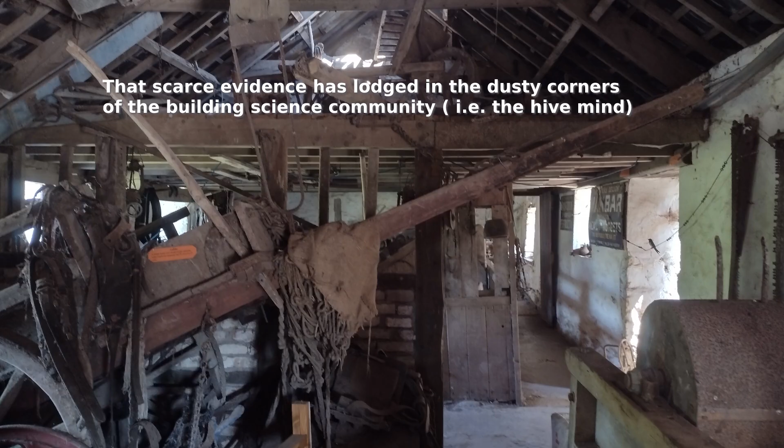Measuring airflows in buildings is a hassle, and it can take considerable resources. Evidence is scarce, and what little exists has gradually worked its way into the hive mind of the building science community, lodged in lots of different dusty corners. Details and assumptions get lost in translation on the way into that hive mind, so concepts get used in ways that the originators might find surprising.

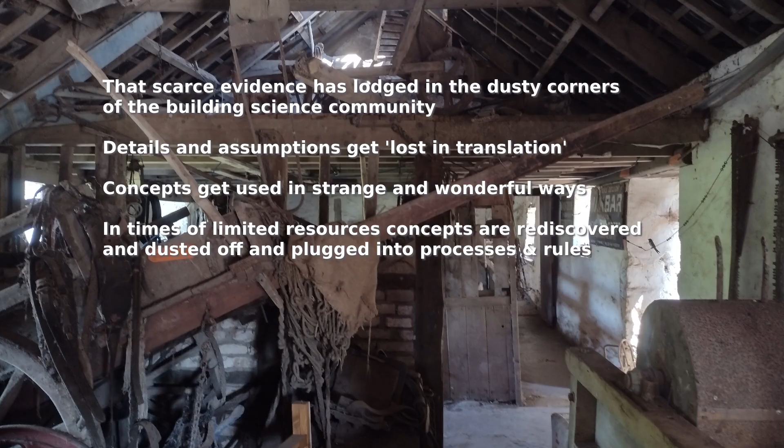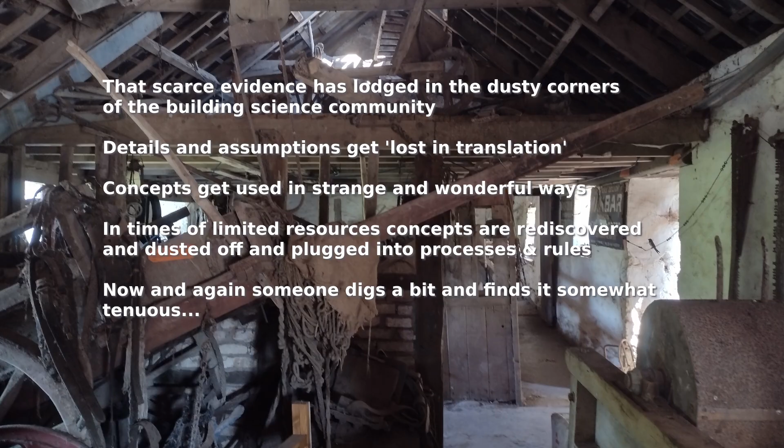Sometimes, when there are limited resources to tackle an issue at a fundamental level, the hive mind remembers one of its dusty corners, a bit of dust is brushed off, and it gets plugged into the various backroom processes and decision-making rules. Periodically, someone digs a bit, finds some aspect that's a bit tenuous or worse, and suggests an alternative convention.

So, suspect 1, the divide the 50 Pascal flow by 20 rule. Suspect 1 is a convention that assumes long-term infiltration rates can be estimated as a fraction of a blower door test value. There's lots of scope for this rather convenient placeholder in compliance regimes, especially in these times of limited resources. I found a couple of examples of groups investigating Suspect 1.

A paper in Energy and Buildings from 2020 compares the divide-by convention with tracer gas measurements in a score of residences in the East Midlands of the UK. The paper found a considerable gap between how compliance tools treated facade leakage and what the measurements were suggesting.

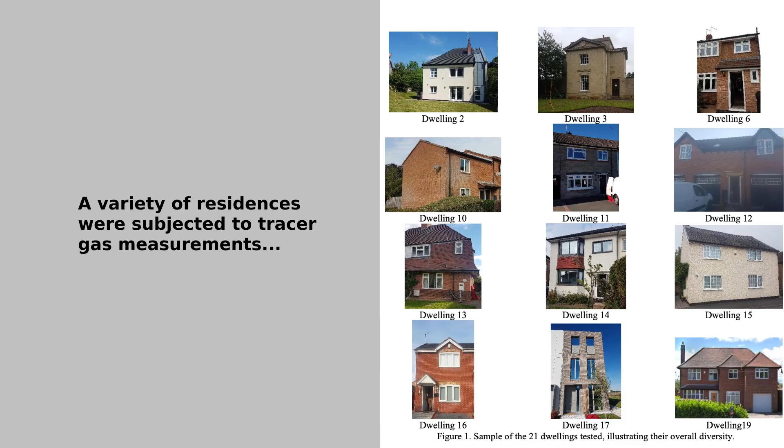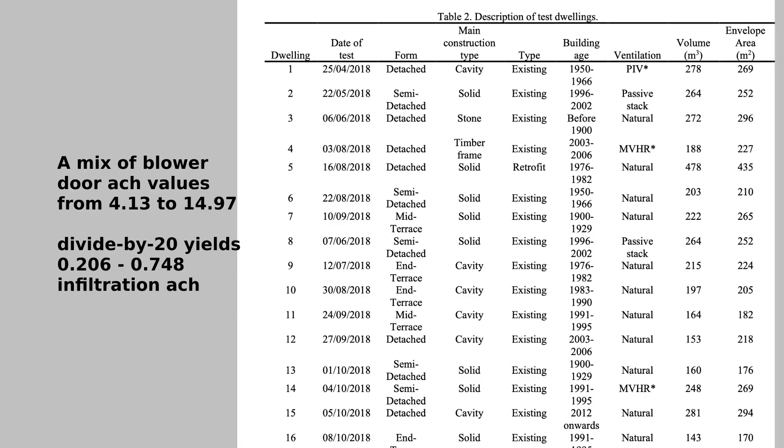The residences were a mix of construction types and ages, from about 1900 to 2012. The blower door test air change rates went from 4.13 at best to 14.97. If we take the divide by 20 convention, it would yield infiltration rates between 0.206 and 0.74.

My observation on this paper is that the building science community still does not measure enough, for long enough, and on an ongoing basis to inform decision makers. There have been incremental improvements in construction since 2012, and it would be really great if a new round of observations could be taken so there was some new information to feed into the hive mind. I'm not holding my breath.

Another bit of digging turns up a 2025 report looking at updating the methodologies for estimating infiltration rates in the UK SAP method.

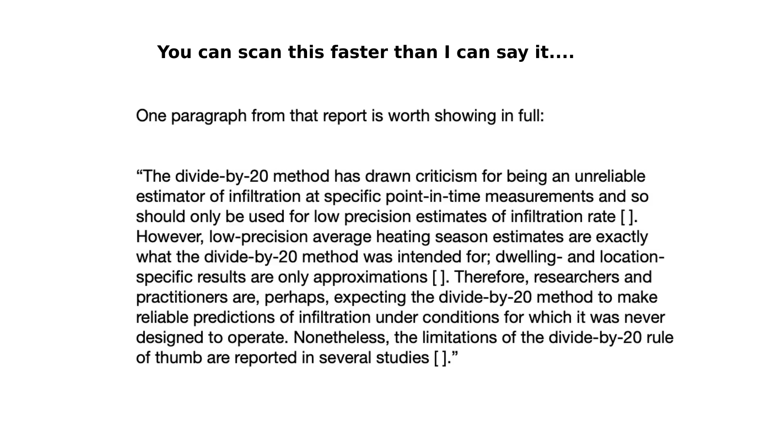My take on this report is that the hive mind forgot the convention was low precision. The thing is, the alternatives that were considered were, in general, still restricted to single zone treatments of a building, and they really only lightly touched on the possibilities of numerical assessments to help out.

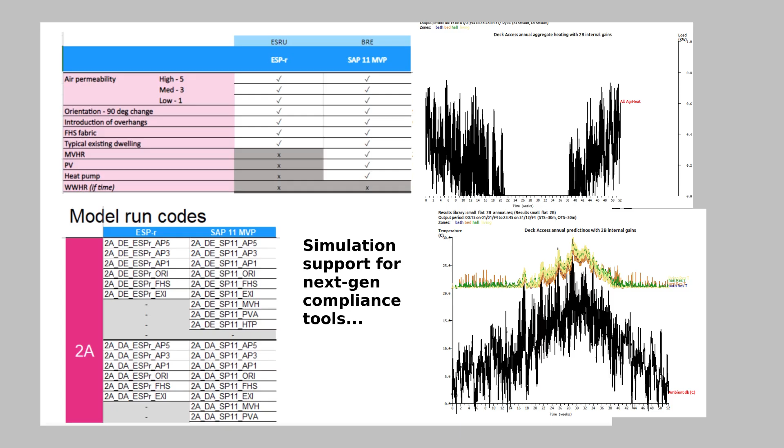On a side note, my group did scores of numerical simulations supporting the development of the UK Home Energy Model, and we found multi-zone approaches far superior to single-zone approaches. I hold a belief that we should let numerical tools do the heavy lifting.

So, let's see what that gets us in comparison with fixing infiltration based on some variant of the divide by convention. A reasonable first question: is that convention applicable when we've got tighter than best practice building blower door tests?

My prior video introduced calibrated orifices around a facade based on a 1.2 air changes at 50 pascals flow test, in the context of a 4-room test building. This flow rate is better than the tests mentioned earlier, but it's also not nearly up to the scratch of what's required in Passive House.

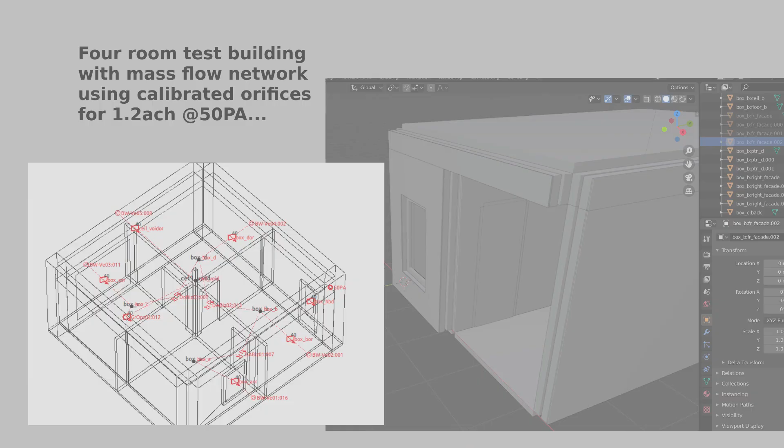Dividing 1.2 air changes by 20 gives 0.06 air changes. That seems to me to be a seriously small number. If we use 2.5 liters per second per person to limit CO2 risk, goodness, we're falling short. And yet, newspapers aren't full of death notices.

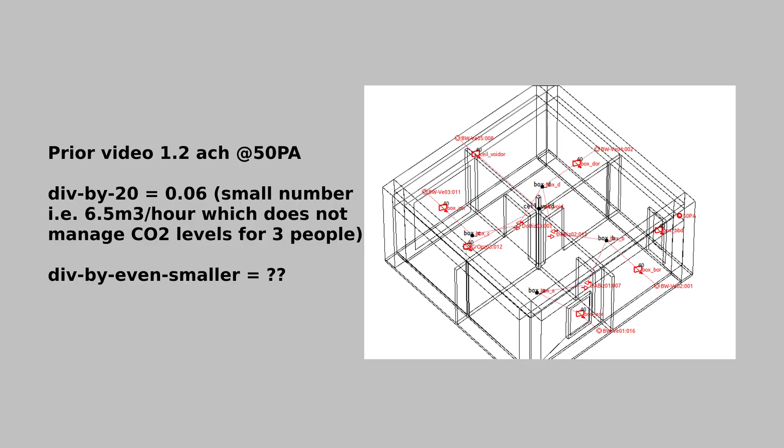A second reality check: remember the slide from the prior video suggesting that at a permeability of 1, which is kind of like Passive House, it's equivalent to a 5p coin-sized hole drilled in each 5 square meter section of the building envelope. Well, for our 4-room building, that's 50 5p-sized holes.

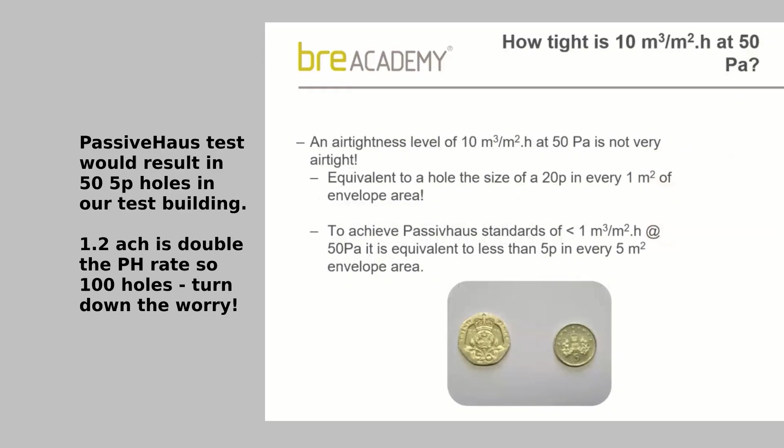In the prior video about the impact of changing wind exposure, there were clearly multiple sets of performance. Let's go over the annual headline numbers from the wind exposure study. Site changes minimally influence the annual extremes in dry bulb resultant temperatures, and they also minimally influence the peak cooling capacity or the hours that cooling is needed.

The annual gains and losses via facade leakage were equivalent to, say, 200 kilowatt hours for a city center site, up to 500 kilowatt hours for an open countryside site. The annual demands for heating range from 190 kilowatt hours for the city center to 300 kilowatt hours in the open countryside. The annual demands for cooling range from 1100 kilowatt hours for the city center to 975 for the open countryside. Those were the annual numbers.

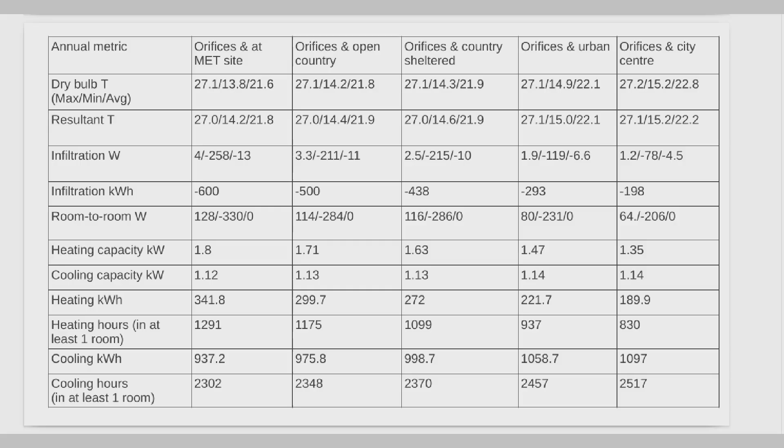If we look at a May week, when wind speeds are typically quite low, the annual pattern for infiltration influence is mostly the same. Changes in the energy impact on air movement roughly reflect the difference in cooling demand over time.

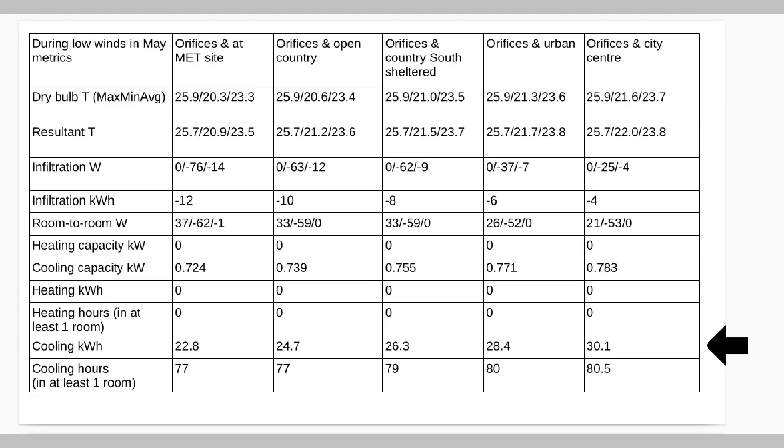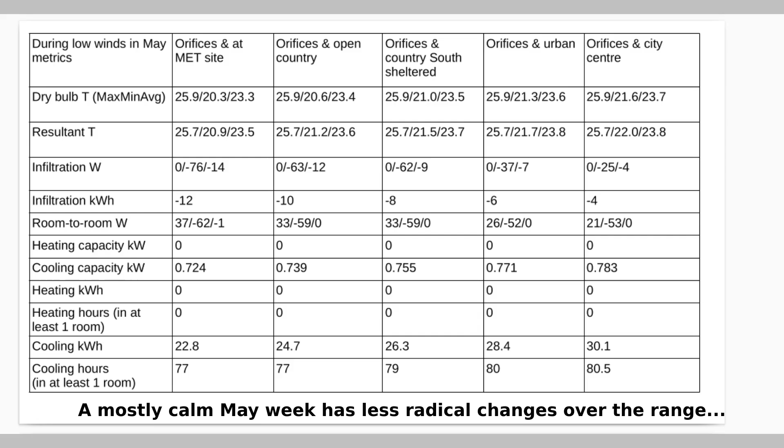Two takeaways from this. If one were to define a divide-by that gave a fair match to the dynamic infiltration assessments for one of the site types on an annual basis, it probably wouldn't be very representative during windy winter conditions. And given the range of dynamic performance predictions in the tables we just saw, it stands to reason that for those who insist on using a divide-by convention, there's no single divisor workable for all sites.

To test these ideas, we need to run quite a few fixed flow variants, creating a reasonable performance matrix to compare within. Here are the different flow rates I ended up running.

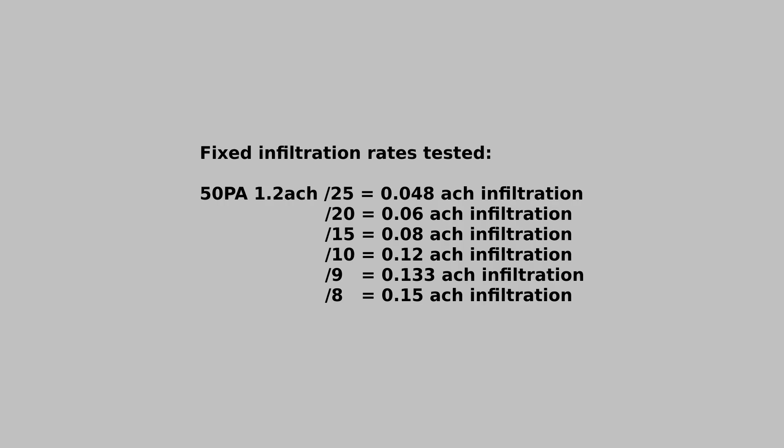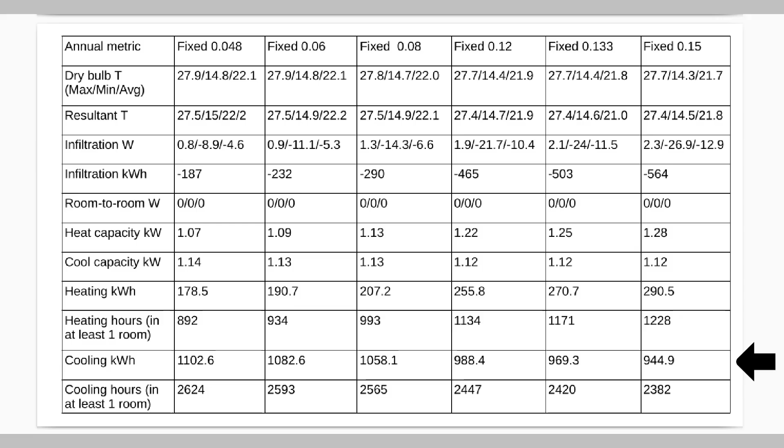Capacity for heating and cooling don't change very much across the range. Heating demands over time range from 178 to 290 as the fixed rate increases. The hours heating is required also creeps up. But cooling demand over time and the hours that's required doesn't really change much.

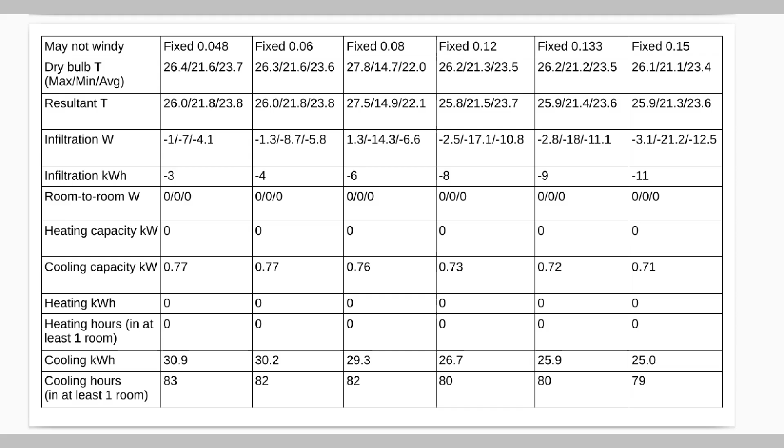If we look at the May, not-very-windy week, we see a tight range for most of the metrics across the range. However, the windy week in January with various fixed infiltration rates shows a gradual transition in each of the metrics. This gradual change is much less than what was observed during the dynamic assessment.

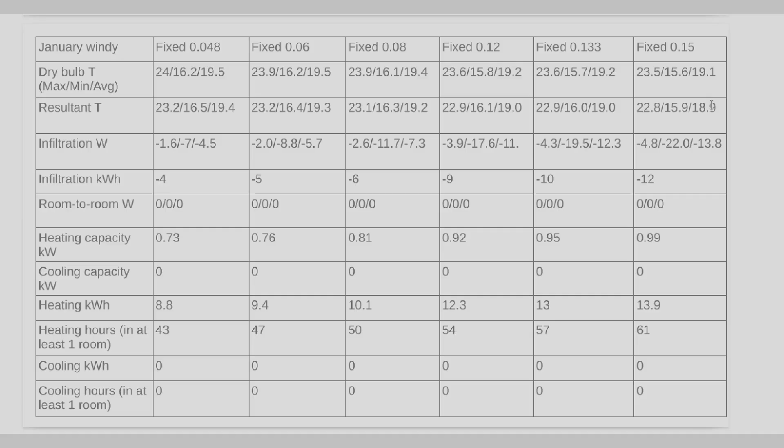So, which suspect matches an urban location? Let's start with a comparison of the calibrated orifice for an urban wind exposure against the nearest divide-by conventions. The annual headline numbers for divide-by 15 are probably the closest for this wind exposure. Energy impact of infiltration is close, as are its cooling capacity and cooling demand. There's a lesser match for heating capacity, heating demand over time, and the hours heating is needed.

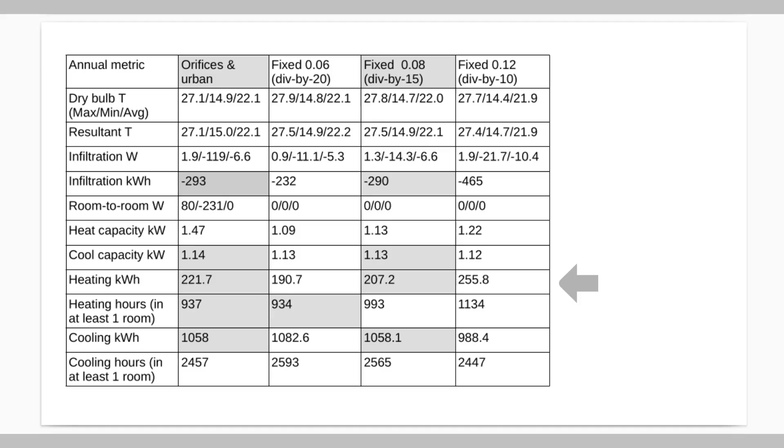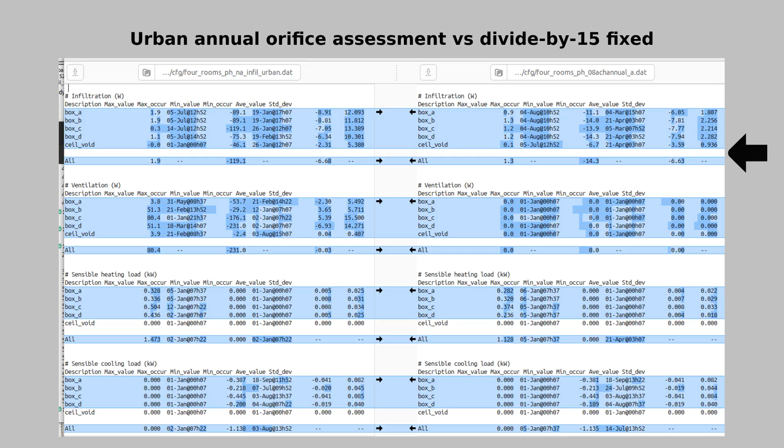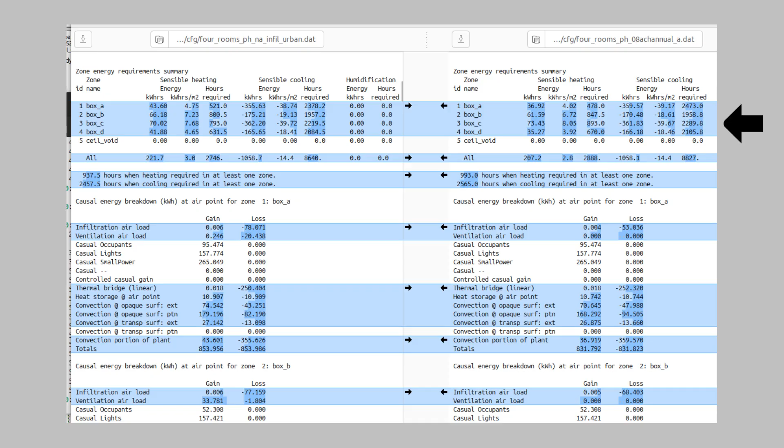How is that so? Well, let's drill down, and the peak energy impact of infiltration certainly differs. There are, however, minor differences in capacity. The energy demand over time differs slightly room by room. The room energy balance shows the orifice approach gives slightly higher losses.

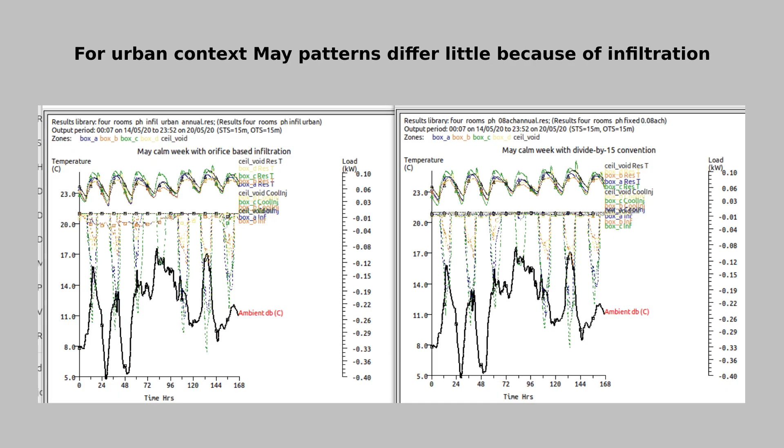If we look at the May, not windy week, we get similar sorts of numbers. And if we drill down to the energy impact of facade airflows, we see little windward or leeward impact on the rooms. If we look at the resultant temperatures in the rooms and the cooling injections and infiltration, the pattern is similar. The differences introduced by the greater infiltration on the left don't really show up in the other lines of the graph.

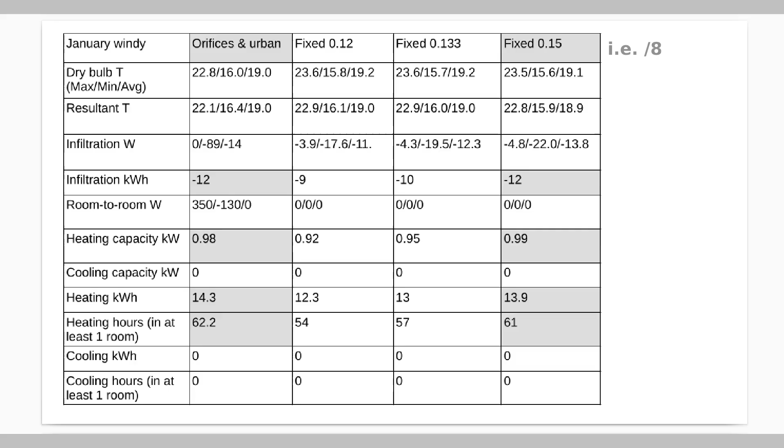Turning to a windy January week, the closest match turns out to be divide-by 8. Several of the metrics are close, and it's worth drilling down a bit. The energy impact of air through the facade shows a very different pattern, and this impacts the heating demands that week as well.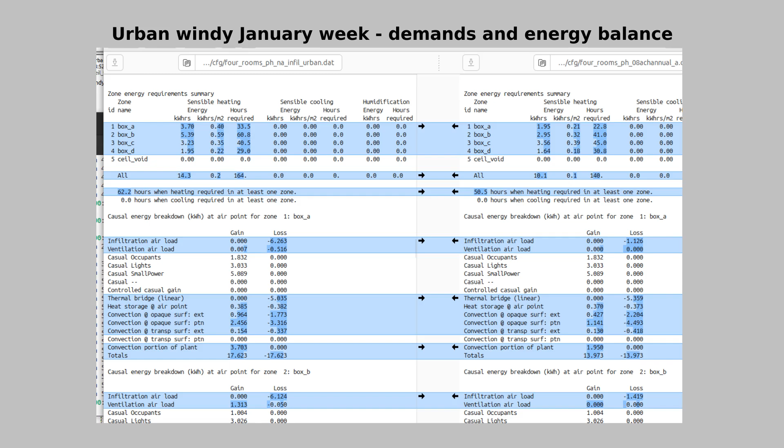The wind this week is mostly from the south, and there's a clear windward-leeward effect. If we look at the energy demand over time, more heating is needed in the south rooms. And in box A, the energy balance of infiltration flips from being a big number to just being a bit of noise. If we graph performance, it's easier to see that the heating demands differ in magnitude and duration.

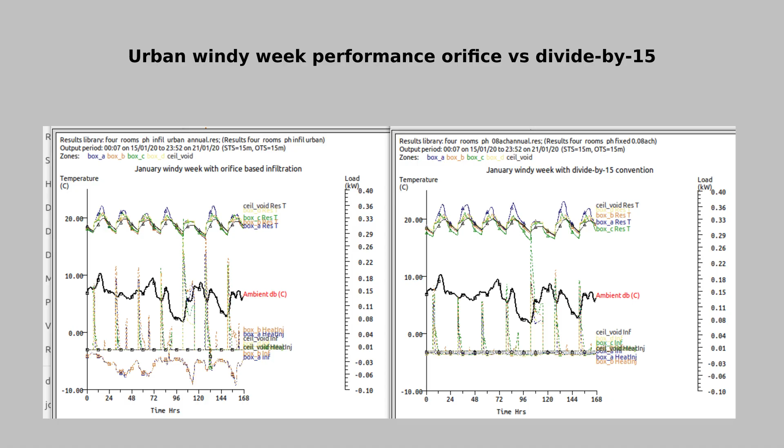What might we take away from this comparison of an urban context? Well, many of the headline values are in agreement, especially over the long term. Accountants will be pleased.

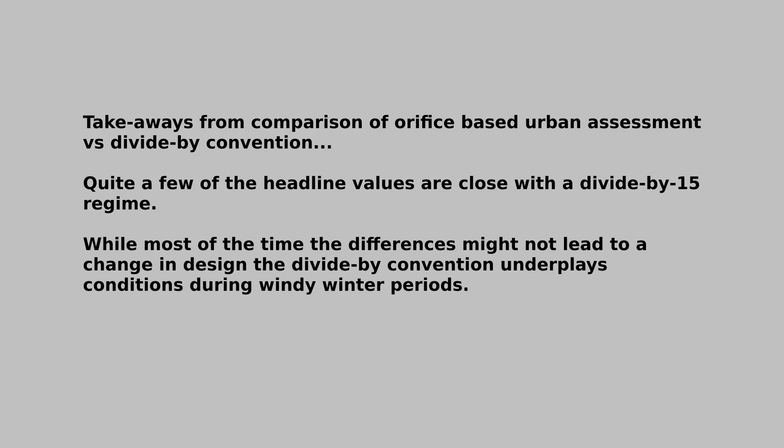However, when we focus on a windy winter week, a different story emerges. Whether these differences might lead to different design decisions is debatable. Certainly the numbers point to windward versus leeward patterns that call into question the basic assumption that infiltration is evenly distributed in a building.

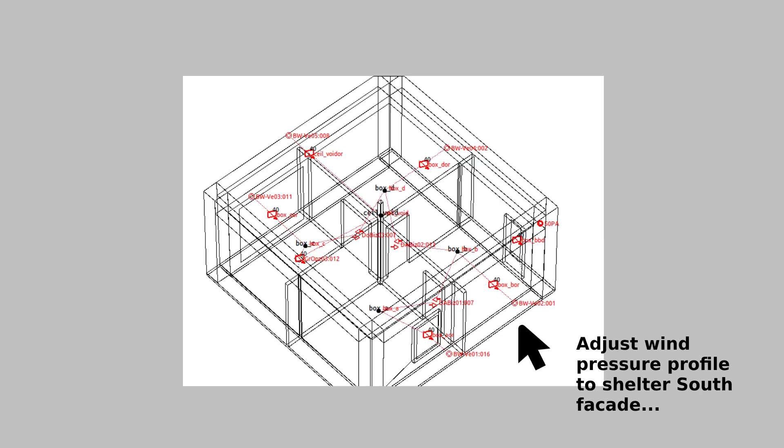Looking at the annual headline numbers, there's a closer fit with divide by 10 convention, but heating is actually a better match with divide by 7.5 convention. Heating capacity is under-predicted in the divide by conventions tested.

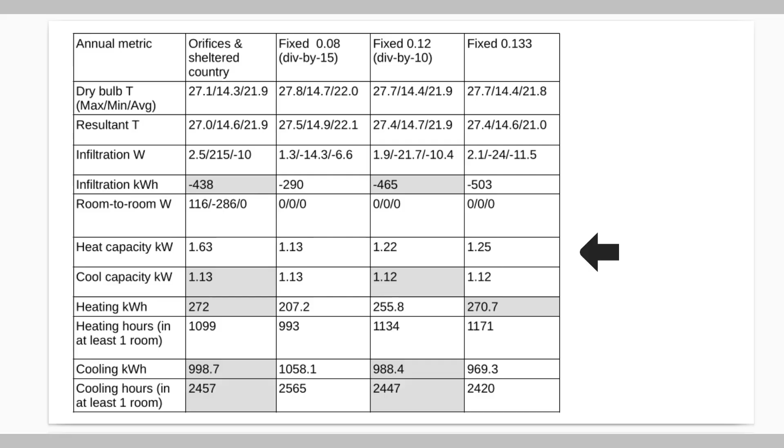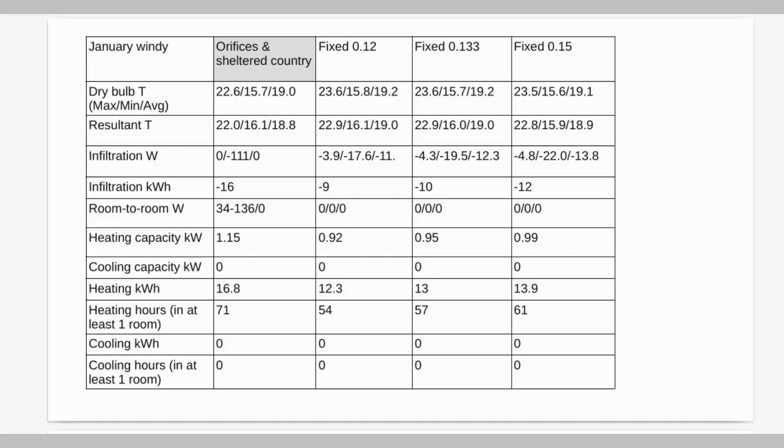If we look at the mostly calm May week, there are quite a few similarities. But if we look at the windy week, none of the tested divide by conventions are close. Heating capacity, demand over time, and hours heating is required are all undercounted.

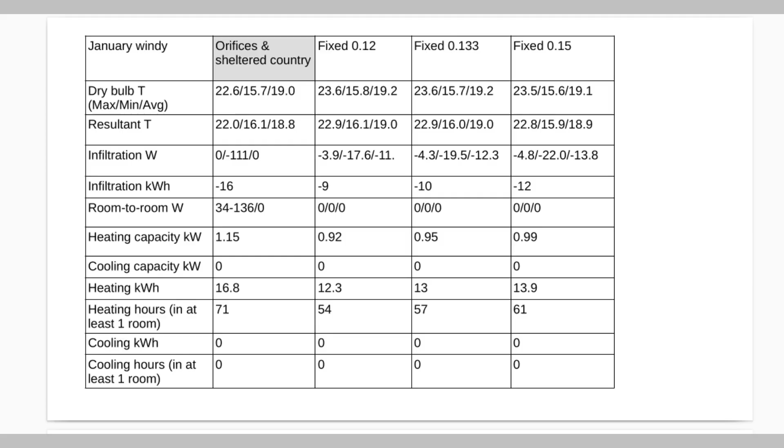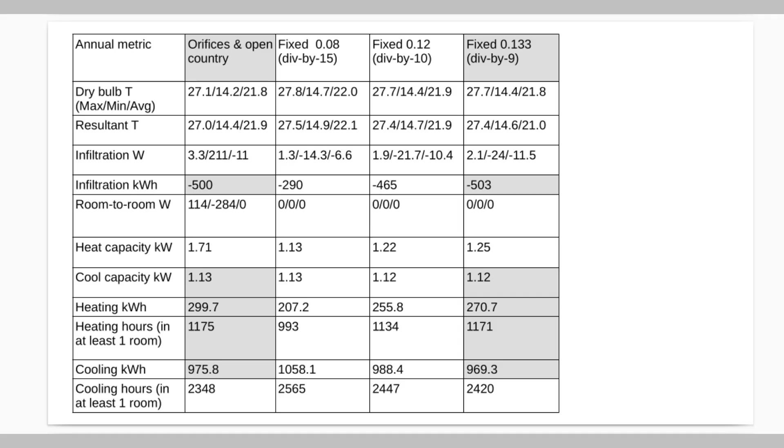Which suspect matches open countryside? Well, taking away the sheltering increases the exposure, and the headline numbers point rather to divide by 9. Again, heating capacity and heating demand over time are underpredicted in any of the divide by conventions I tested.

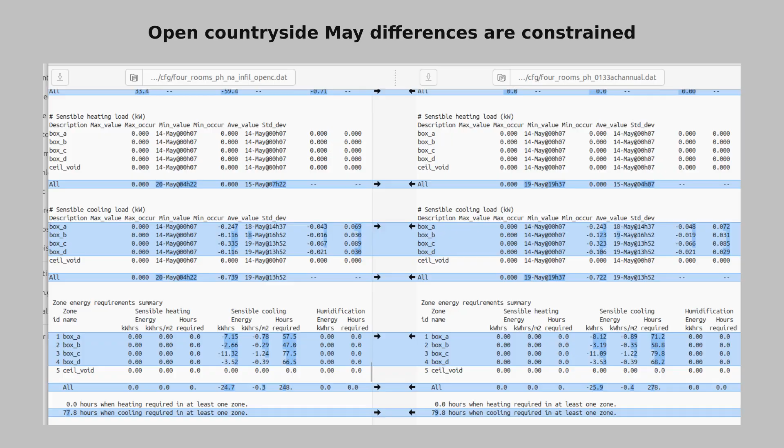If we look at the mostly calm May, there are, yes, quite a few similarities. But the winter week, nothing tested in the divide by conventions is vaguely close. Again, heating capacity, demand over time, and hours required are all undercounted.

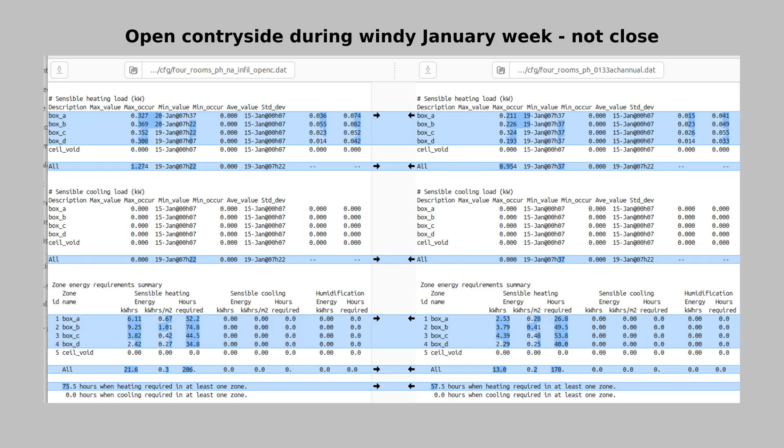But the process gets seriously tenuous when dealing with windy winter conditions. So relying on a divide-by for winter adds risk to the provision of heating and the running costs of heating.

So what happens if the comparison is with what most people would consider the most sheltered position, that of a city center location? Well, the annual headline numbers for divide by 20 are in line with the city center wind exposure, although heating capacity is somewhat of an outlier.

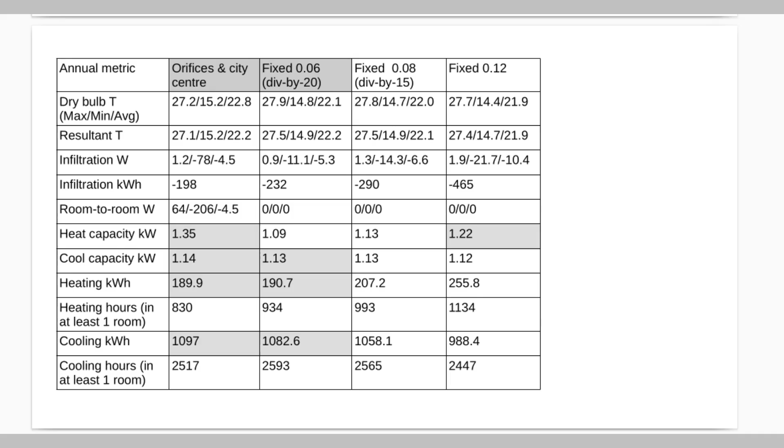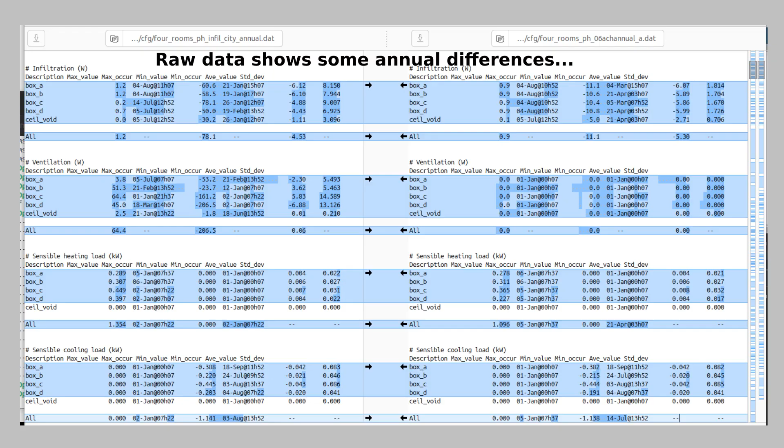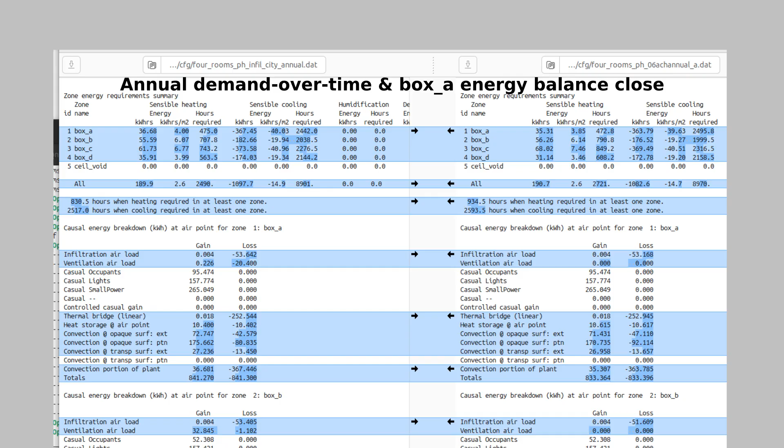Let's drill down to the raw report and see the differences over the year. Well, they're reasonably constrained differences. Looking at the heating and cooling demand overall, the match is slightly less good at an individual room level. The annual energy balance for the front left room is eerily similar with the orifice and with the fixed approach.

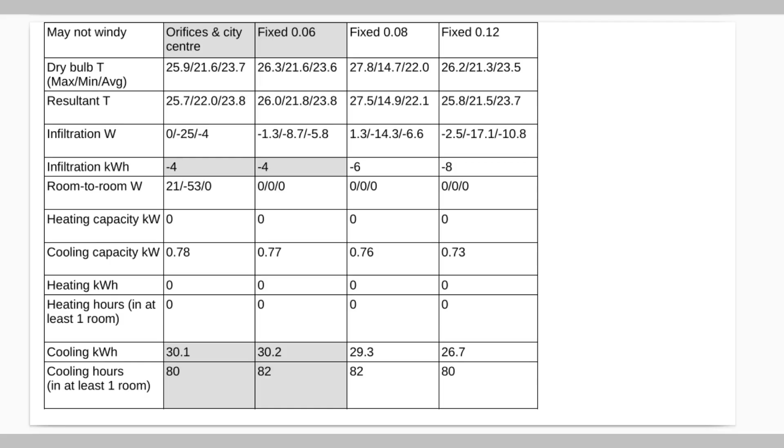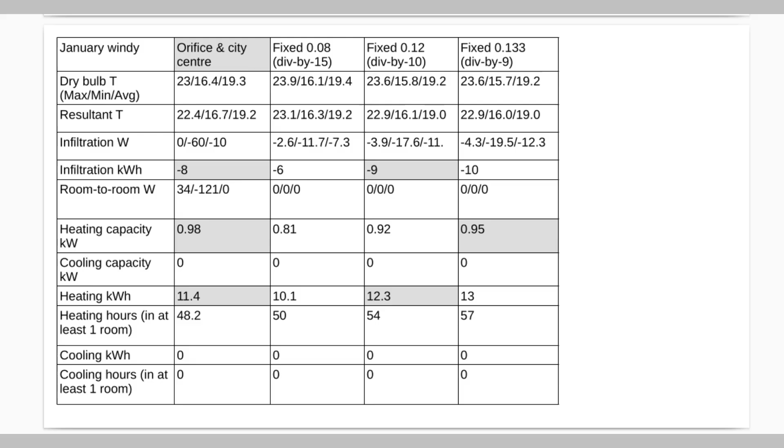If we look at the May, not windy, week, there's a reasonably close match to the divide by 20 convention. Now, drum roll, what about the windy January week? Well, when we look, the possible matches are all over the place. Let's drill down a bit and look at the monthly energy impact of infiltration.

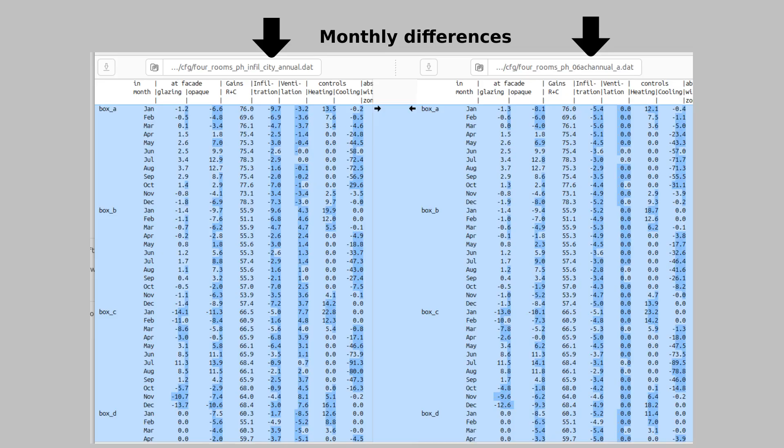On the left is the infiltration values. Well, they're greater magnitude and they dance around a lot more than the columns on the right. The rooms which were on the leeward side, such as Box C, had little orifice-based infiltration in some months.

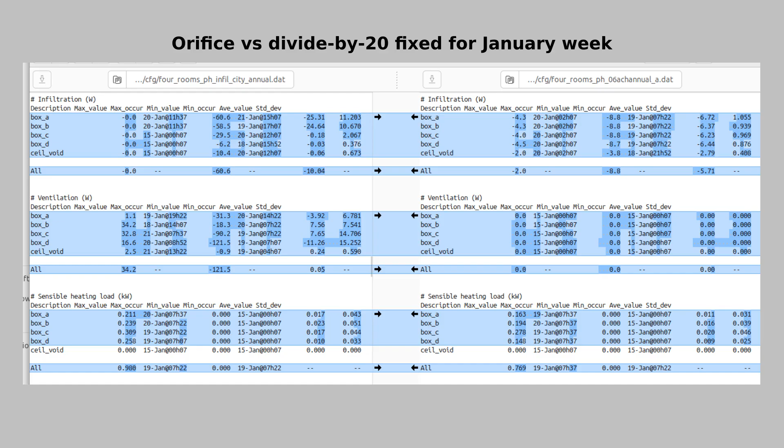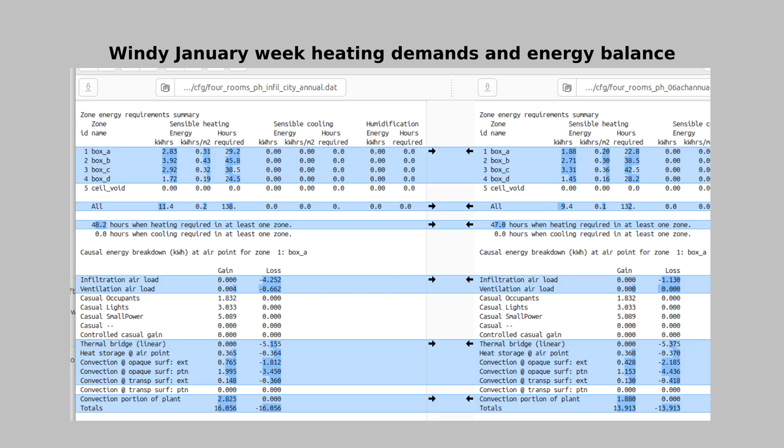If we look at the windy January week, the energy impact of infiltration is vastly more in the case of the orifice-based assessment, and the heating demand reflects this. For the energy balance of the front left room, the total gains and losses are greater for the orifice assessment. For the city center site, the May performance is actually quite similar to the annual.

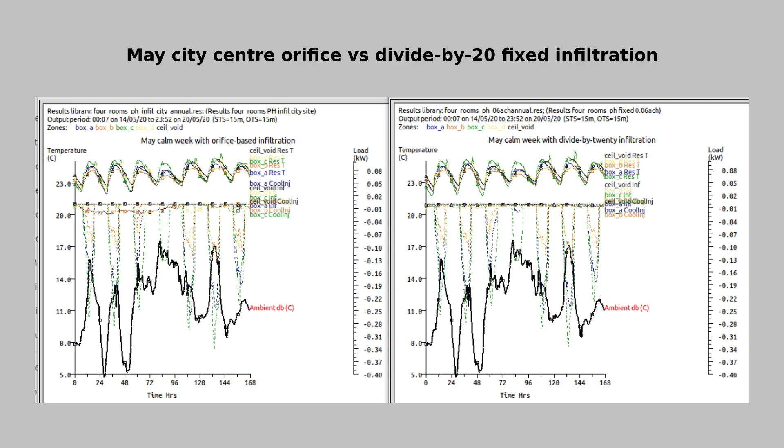So the annual headline rates, which the box tickers will notice, are complicated by windy weather periods which show a different pattern. Indeed, there were differences in each month at the room level due to windward and leeward effects.

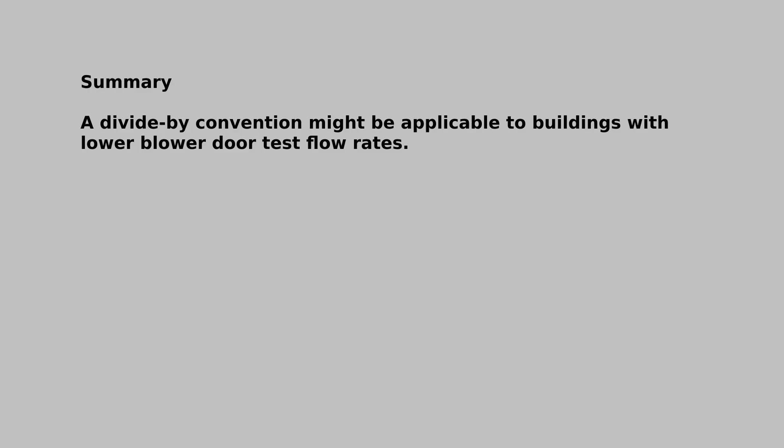In summary, on the question of whether a divide-by convention was even applicable to buildings with blower door test values approaching one air change at 50 pascals, yeah, it was possible to find a divide-by rule convention that was roughly similar. The most common suspect, divide by 20, was really only viable for the most sheltered of locations with this particular model.

The comparisons hint that those who would like to use the divide-by convention should have a suite of divide-by options that are brought into play depending on the wind exposure of the building site.

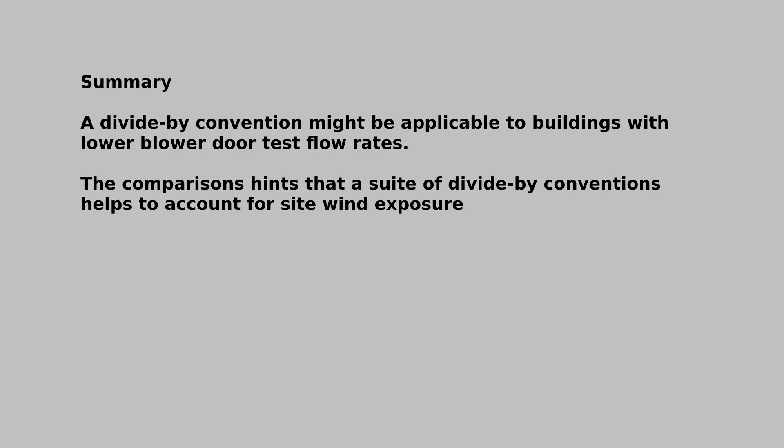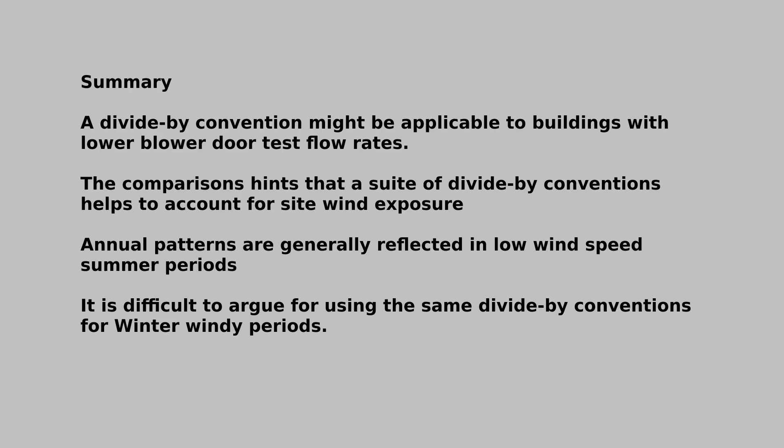In general, annual patterns were reflected in the May week with moderate to low wind speeds. However, the comparisons of winter and windy conditions showed that divide-by conventions are far more difficult to argue for. The distribution of infiltration is sensitive to changes in wind direction. The windward side of buildings will often have rooms with rather more than the nominal infiltration rate, and conversely, leeward rooms will be dominated by exfiltration and the movement of air into them from adjacent spaces that happen to have higher pressures.